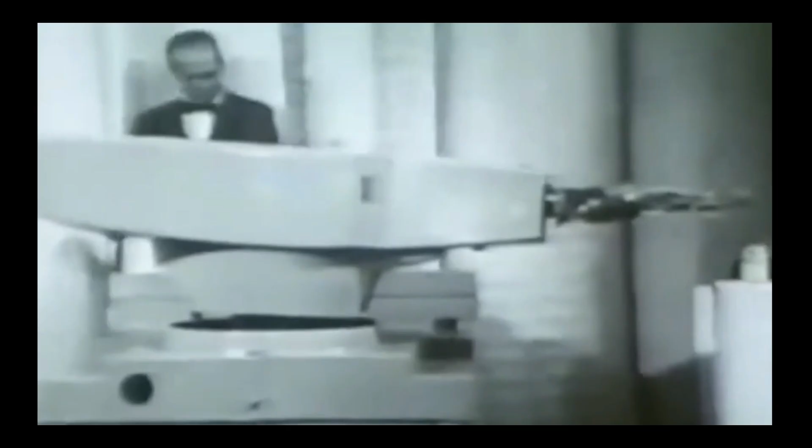Would you welcome Joe Engelberger? Joe? And ultimately, the show that was so important to us was the Johnny Carson show. That means it could play better golf than Carson could. Is that wild? You see, in case you get tired and can't make it to the show someday, we can program the machine to do a commercial. Now what he's doing is programming what he's going to have the machine do. He's putting this information into the machine. Take it on the downbeat.

So when I hear that people are worried that robots are going to take our jobs, as roboticists I point out that in 1966 we were already worried about robots taking the band director's job and the advertiser's job and all these crazy working smart things.

But the real message here is safety. In spite of the fact that you had an industrial robot, which was very dangerous, on stage next to Johnny Carson, it could have killed him. The industrial robots, there's no people involved.

So we're talking about humans in robotics. Just go back to the beginning and look at the last 60 years of history of robotics, most of it was robots behind safety cages, because safety is the number one issue about people and robots. And so when we didn't know how to solve it, we just said keep the robots and people separate.

Over the last 20 years that started to change. It started with little tiny robots that are sort of inherently not dangerous. And it started as early as 1979 with robots that just go really slowly and follow a track, and their whole thing is if anything gets in my way, just stop.

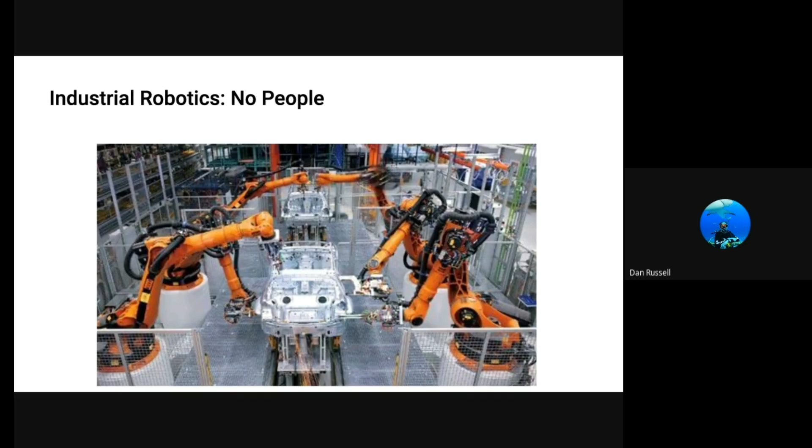I'll give you a little clip of that. Which gets to the second point: safety is one, and then the question is, why do you want robots around people at all? You want robots because you want efficiency. So here's your mailbot.

So if you want to see him go out, come back at 2:30. I don't know how, it goes a little way, but I don't know how long it'll go.

How do you and Igor get along? Fine, problems sometimes, but it works great. It's better than walking around delivering the stuff, saves a lot of time. Not much problems, it'll go offline and it's hard to start up again. There's little tracks right down there, and it's got to be on the tracks or it'll stop and it won't go. It doesn't take long if you know what to do. If you want to see the inside of it, I'll show you. This will control it if it's offline, and this little light will go on, and that'll show you that it's offline. And these will tell you how low it is, and you plug it up so it gets juice in it, so that's good. And then it's got the bumpers on it, it's a little broken, but like if... How do you feel about having a coworker who's a machine as opposed to a person? It don't really matter, it's less, you can't argue with it. It works the way you want it to. It does what it's supposed to do. It's better, it doesn't have to be paid either.

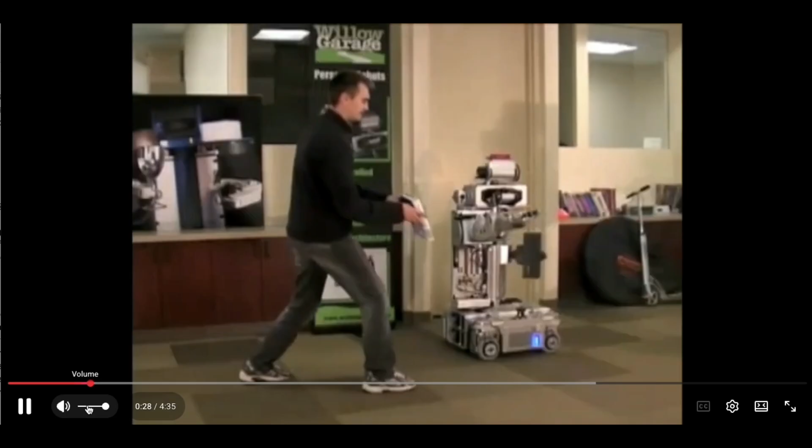Guinness, it would bring you that beer, but if you asked for a Bud Light, it would say, 'Are you sure you want a Bud Light?' This was playing pool, and delivering a beer and playing pool were both 1-week projects once you had the hardware and the core software. So that was the big thing about this.

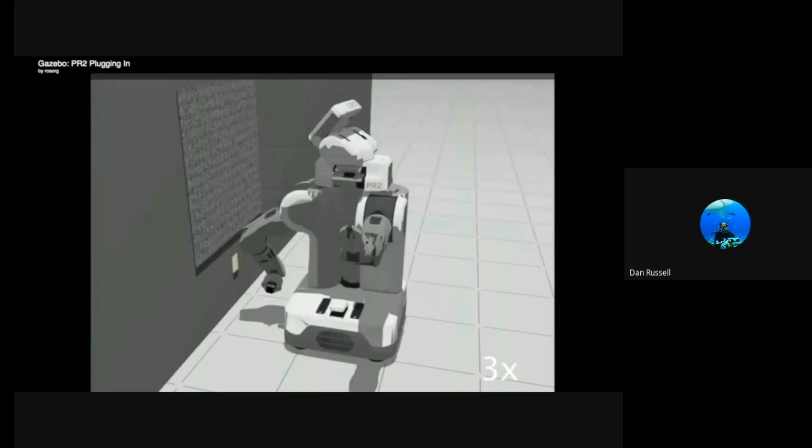And this was happening again around 2010, 2011, so just a little over 10 years ago, and that was state of the art. Some of the challenge problems, like can you push a cart with the robot? A lot of these things, people start to take it for granted now.

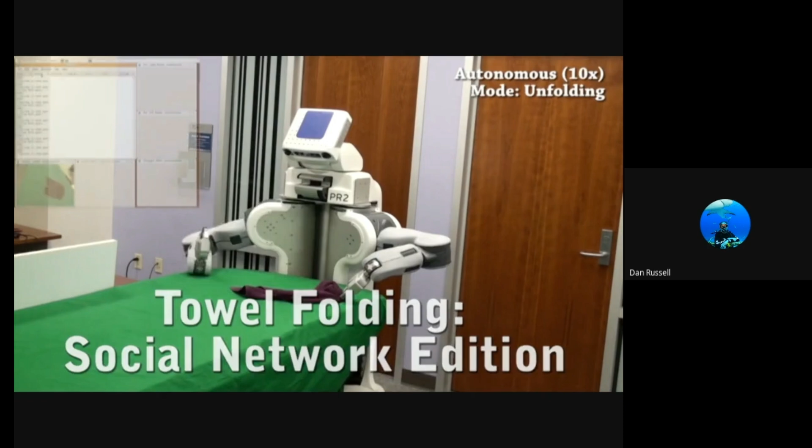The other thing we learned at Willow Garage is that in robotics, if you see a video, you usually don't want to trust it, right? We can try a demo 100 times, and when it works once, we got that one on video, and then it gets shared. That was kind of what was happening. The point of building 20 of these robots was people could repeat each other's experiments and prove that it wasn't just a one-off thing.

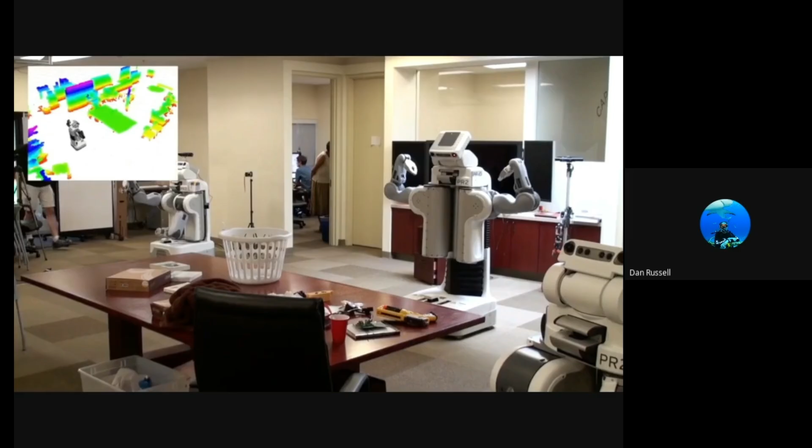So a lot of this was about creating software and hardware. This TurtleBot is a very popular platform now, and it's a lot cheaper. We built all these systems with the idea that let's let people work together, let's work on collaboration, and then let's look at home and human scale tasks.

One of the tasks, this was one of the workshops, lots of different videos of this robot. Interestingly today, I think maybe 1 or 2 of the 50 robots that we built like this are still in service. So after 10 years, the hardware goes bad.

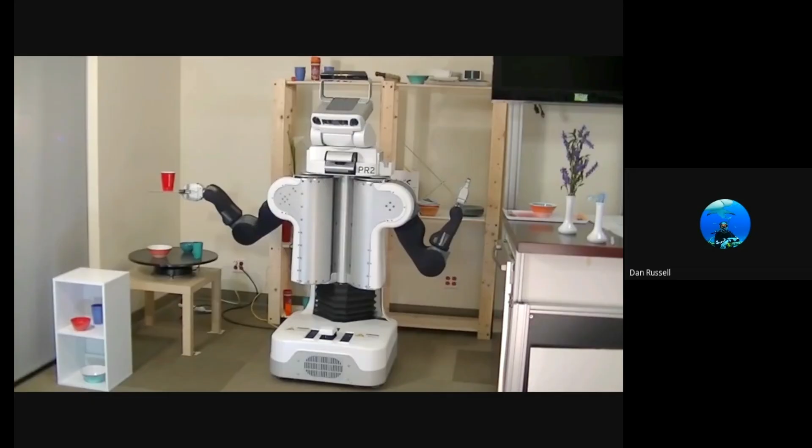The software has continued to evolve and continues to be supported, and is the standard. The robot operating system is called ROS, and it's the standard in robotics. So it's interesting to think that when you create something, we thought, oh, the hardware is so cool. I show this because we worked so hard on computer perception, and all that stuff was terrible because we were waiting for that breakthrough in foundation models that happened around 2012, when this system was ended.

This is pretty cool: using a cup full of water, you can move it without spilling it. So that's just a little overview of kind of where I came from, back in robotics. But a lot of the thoughts in those days were, how can we put robots around people? How can we make a difference for people?

One of the interesting things, we did a whole year-long study. First we asked the question, where should we focus? Should we focus on robots in the home, or should we focus on factories? Since factories have been well served by robotics for 50 years at that point, we said, let's look at the home. And we studied the home for a year. What do you think people want in home robots? What do you want your home robot to do?

Anybody? I wanted to cook my dinner. Cook? Yeah. Laundry, dishes. I wanted to clean. Clean, yeah, that's fine. Make my bed. What came up as the top 3 for us was laundry, dishes, and they wanted the robot to do our homework, which is not really a good use of robots. I mean, it might be from the kid's point of view, but from the parents' point of view, it's not a good use. And interestingly, with laundry and dishes, you already have 3 machines to do those 2 tasks in your home today, but it's not enough. Somehow we want more. We're very spoiled.

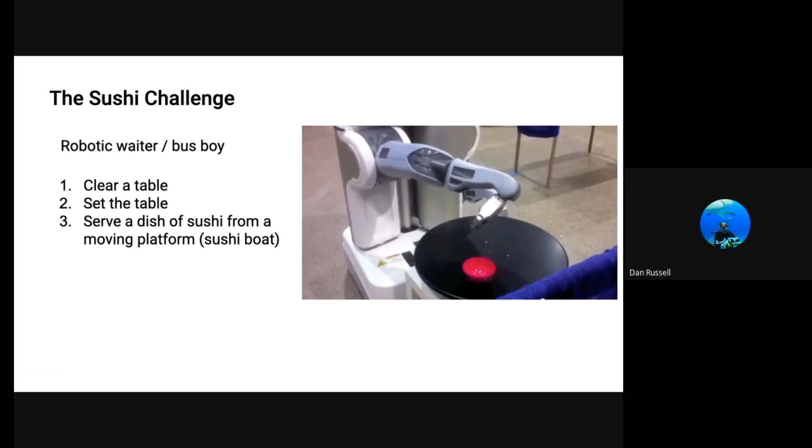So people were experimenting with different interface devices that allowed me to control and have the robot mirror what I'm doing, if I look through the robot's eyes.

Hello, I'm mute and quadriplegic. Can't talk, can't move his arms, can't move his legs. I'm mute and quadriplegic. I saw your robot on CNN, and I'd like to use that robot as my external body. Can I please try it?

And we're like, this is a weird request. But he lives in Palo Alto, so we invited him down to Menlo Park and got to know him a little bit. Turns out he can move his head. So he moves his head, and you put a dot on his glasses with a camera. The camera tracks the dot and maps it to mouse motion. So Henry's able to move a mouse on a screen, which means he can do an on-screen keyboard. An on-screen keyboard means he can send an email, and that's how he had communicated with me.

So that was interesting, we thought maybe Henry could use the robot. We all went our separate ways, went back to work, and then 2 months later Henry sends me another email with an attachment. He says, I designed a user interface for me to use with your robot, I really want to do it, would you please implement this interface and have me back? This is a really strange request, but Willow Garage was a strange place, we were a think tank. So we had Henry back a couple months later after we had a student implement the interface.

Imagine there's a table here, and Henry's sitting here with this computer in his wheelchair, and here to the left is the PR2 robot. We had a bunch of things on the table for the robot in the midway, and we're thinking Henry's going to reach the arm forward and pick something up. The interface was kind of simple. He doesn't do any of that.

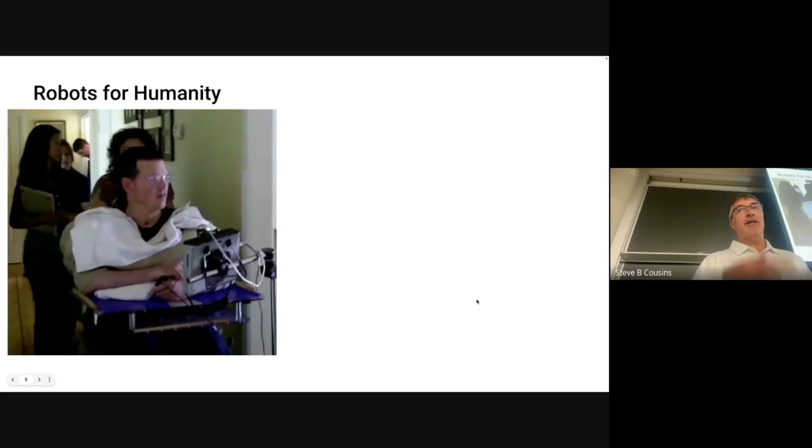30 to 40 times a day he gets an itch, so much so that he has a gesture with his head that he does for his wife that means 'scratch my itch.' They communicate with really cool stuff. Actually, I'll show you.

Hello, my name is Henry Evans, and until August 29th, 2002, I was living my version of the American dream. I grew up in a typical American town near St. Louis. My dad was a lawyer, my mom was a homemaker. My 6 siblings and I were good kids, but caused our fair share of trouble. After high school, I left home to study and learn more about the world. I went to Notre Dame University and graduated with degrees in accounting and German, including spending a year of study in Austria. Later on, I earned an MBA at Stanford.

I married my high school sweetheart, Jane. I am lucky to have her. Together, we raised 4 wonderful children. I worked and studied hard to move up the career ladder, eventually becoming a chief financial officer in Silicon Valley, a job I really enjoyed. My family and I bought our first and only home on December 13th, 2001, a fixer-upper in a beautiful spot of Los Altos Hills, California, from where I am speaking to you now. We were looking forward to rebuilding it. But 8 months after we moved in, I suffered a stroke-like attack caused by a birth defect.

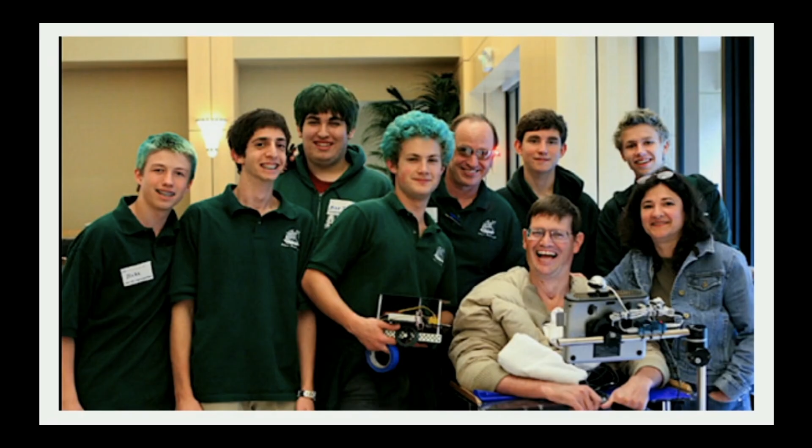Overnight, I became a mute quadriplegic at the ripe old age of 40. It took me several years, but with the help of an incredibly supportive family, I finally decided life was still worth living. I became fascinated with using technology to help the severely disabled. Head tracking devices, sold commercially by the company Madentec, convert my tiny head movements into cursor movements, and enable my use of a regular computer.

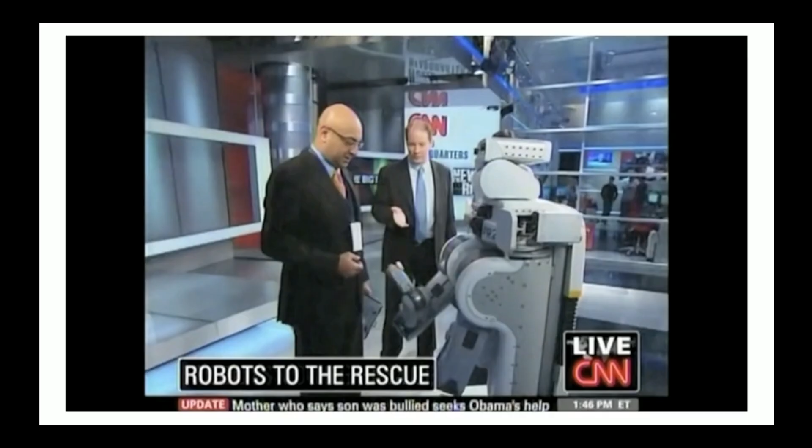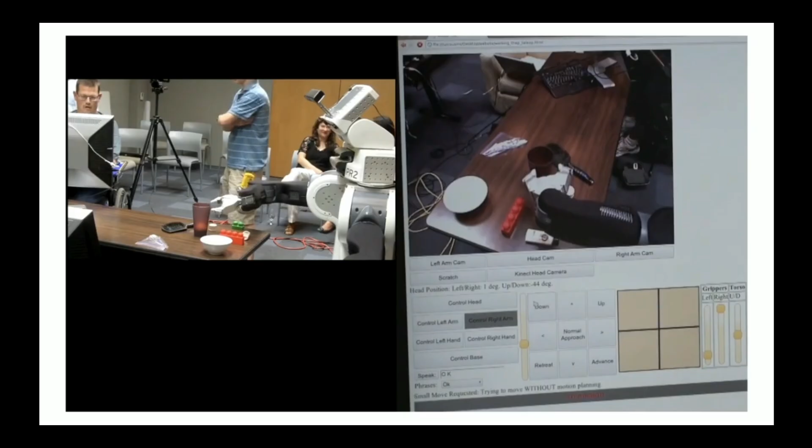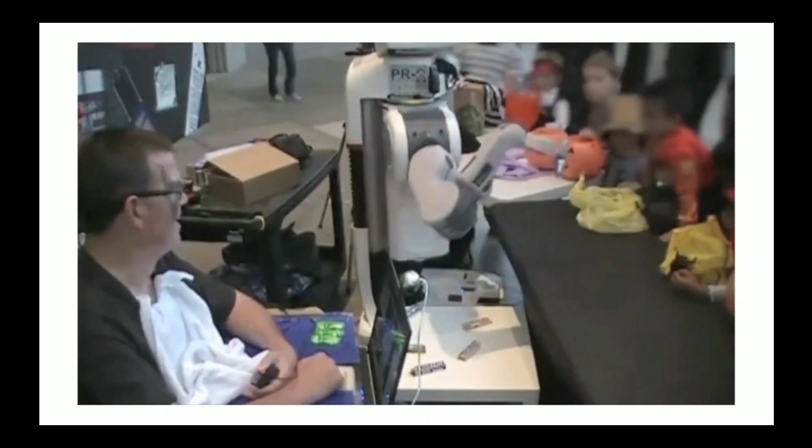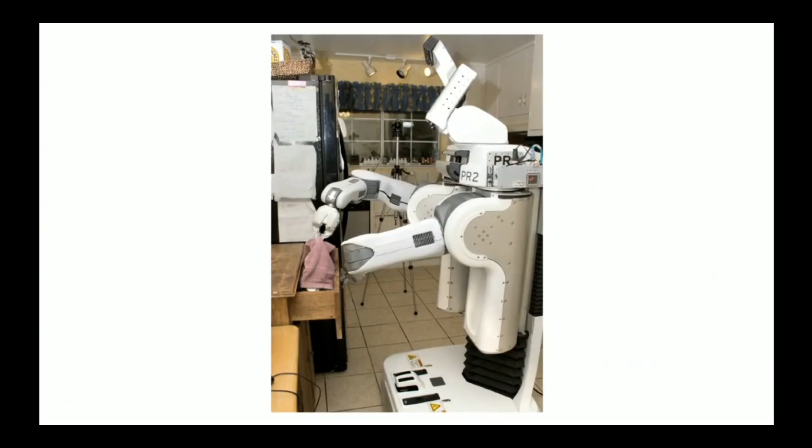I can surf the web, exchange email with people, and routinely destroy my friend Steve Cousins in online word games. This technology allows me to remain engaged, mentally active, and feel like I am a part of the world. One day, I was lying in bed watching CNN when I was amazed by Professor Charlie Kemp of the Healthcare Robotics Lab at Georgia Tech demonstrating a PR2 robot. I emailed Charlie and Steve Cousins of Willow Garage, and we formed the Robots for Humanity project. For about 2 years, Robots for Humanity developed ways for me to use the PR2 as my body surrogate. I shaved myself for the first time in 10 years. From my home in California, I shaved Charlie in Atlanta. I handed out Halloween candy. I opened my refrigerator on my own. I began doing tasks around the house. I saw new and previously unthinkable possibilities to live and contribute, both for myself and others in my circumstance.

So you get the idea, it's pretty amazing. And over 10 years, actually 12 years now, since 2013 when he gave that TED Talk, he's managed to survive, which is an amazing thing. If you're a mute quadriplegic, to be 20 plus years out from the event that caused it is pretty amazing.

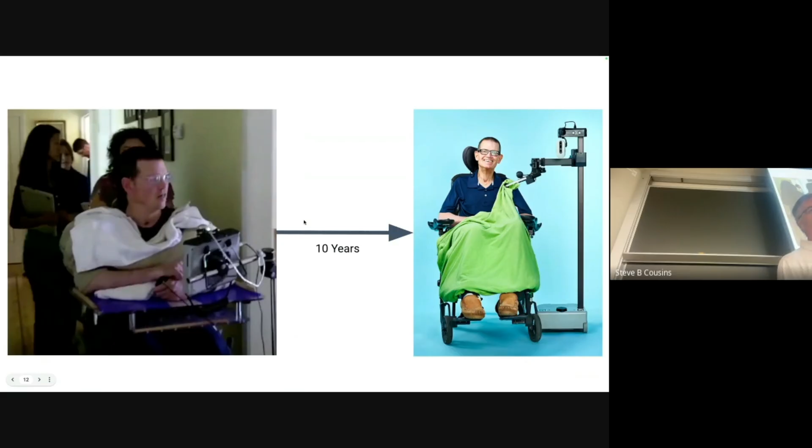The coda to the story is Henry recently had his granddaughter over to his house, and his granddaughter typically would ignore him because she viewed him like a piece of furniture. He's just sitting in the chair, he's not moving. But he started using this robot to play with her. And when she went home after that, before she left, she gave him a hug. So that's kind of the coda to the story.

The other interesting thing that came out of Willow Garage was this telepresence, and it seemed like a great idea, right? Henry used a robot like this for his talk. This is the original version that was built by a guy who lived in Indiana, but he wanted to work in California, and he wanted to be part of the group. Before he built this robot, I knew that we had a person in Indiana, but I had no idea what he looked like or anything about him. After we had the robot, he's wandering down the hall, and you'd pass him and go, 'Hey, Dallas,' and he'd say, 'Hey, Steve.'

And so it's just normal hallway interactions, which is amazing in terms of making you feel like you know somebody. This robot also turned out to be the same robot we leased to the studio that did the Big Bang Theory. So this was the Sheldon bot, if you ever see that episode. But it wasn't successful, right?

Scott Hassan, who's got a lot of money and had funded Willow Garage himself completely, went off and funded this company called Suitable Technologies to build this beam. They called it the beam, this telepresence robot. And in the end, it was not successful, right?

And why? It's timing, right? He started it around 2013, 2012, and by 2019 they shut it down because in that same time period, smartphones appeared, right? You don't realize history is changing, and there was no Uber 15 years ago. It's amazing how fast things are changing. Now we're like, well, Uber's old school.

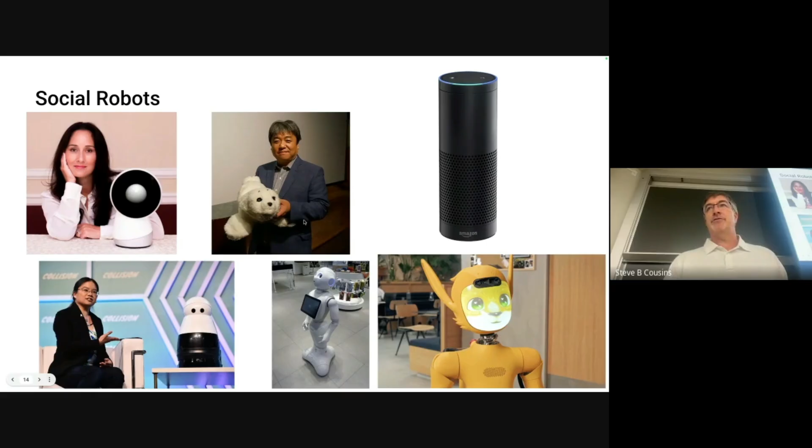But the alternatives is always the interesting question.

You can see we were trying to literally design delight. And this is the biggest problem with putting robots in hotels - it turned out to be elevators, of all things. This was our attempt to solve that problem, which is another interesting human-robot interaction thing.

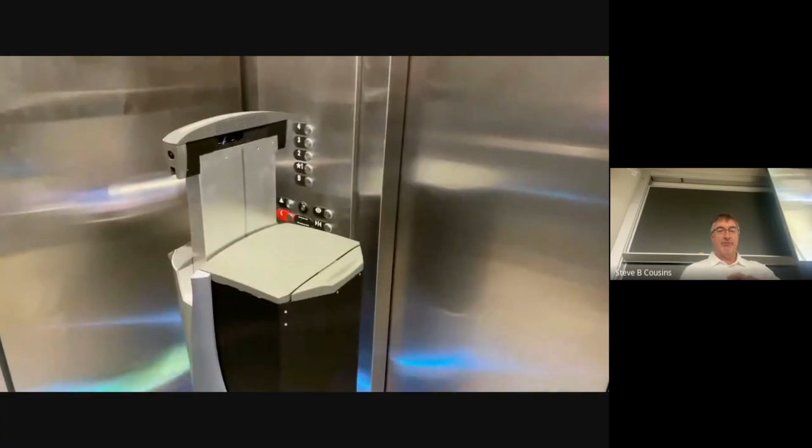So we built this little delivery robot called Relay, and the idea was it can deliver to your hotel room, you can bring stuff. And the first question was, okay, in order to get to your hotel room, you have to ride the elevator. Are people going to be okay with that? So where do you stand to wait for the elevator? When you get in the elevator, where do you stand?

So we designed this whole system where the robot would stand off to the side because you got a lot of people exiting, delay a little bit, door opens, and the robot's in control of the elevator. So we had to do a wireless interface to the elevator, so we could tell it, come to the first floor, and when the door opened we would say hold the door. Now we have plenty of time to make sure everybody's out, and we would get in, and then we would turn to face the door. Doors would close, and we would stand there very quietly until it got to our floor, and then when the doors opened, we would say hold the door, and we would get out. Everybody was okay with that - it wasn't a big problem.

But it turned out to be a big problem to get integration with the elevator, for a bunch of reasons - you can imagine what happens when you lose connection with the elevator while you're riding it. So I don't have connection to the elevator, the door's open, should I get off or not? I don't know what floor I'm on. So we had to do all kinds of cool engineering hacks, and we got it to work. But eventually we decided it takes too long and too much money to integrate with the elevator wirelessly, because you have to go through the elevator company, they have to do the work.

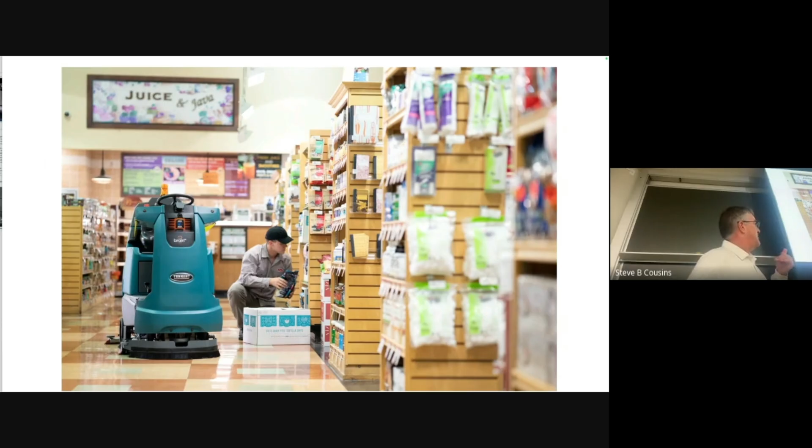And this one actually is fairly successful. Walmart's got a bunch of these. They're in grocery stores and things. So just another example of robots you may see in your life that you don't realize are there.

This is a very subtle one. This is a woman from Japan who works for IBM Research, and she's blind, and she designed a robot in a suitcase form factor. Basically, it's got all the sensors of a robot. It's got a little bit of motors so it can move itself, and it's got haptics in the handle so she can feel obstacles and things. And then she just walks with her thing, and it looks more subtle.

Now, interesting thing—there's a student here, an undergrad, we've been walking. What's the project called? BIM. There's a project called BIM. And what they did is they gave you a handheld, a replacement for the white cane, right? And they found something very interesting.

The handheld device will give you, like, you can simulate all the haptics of taps pretty well, and give the sight-impaired user the ability to navigate through the world nicely with this thing. But there's no white cane anymore. So the people around don't realize that this person is sight impaired, and they might run into you.

If you see somebody with a white cane, you're going to give them a little bit of a wide berth. That's a signal. The white cane is a signal to the rest of the people. We've taken away that signal. So this is, again, to Dan's point about, when you put technology in, you've got to think about the alternatives.

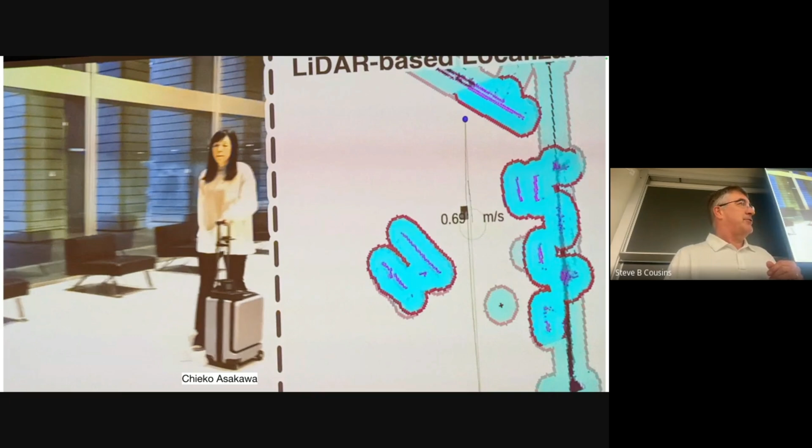All right, I think at this point, I'm going to turn it over to Michelle and talk about the future of senior living.

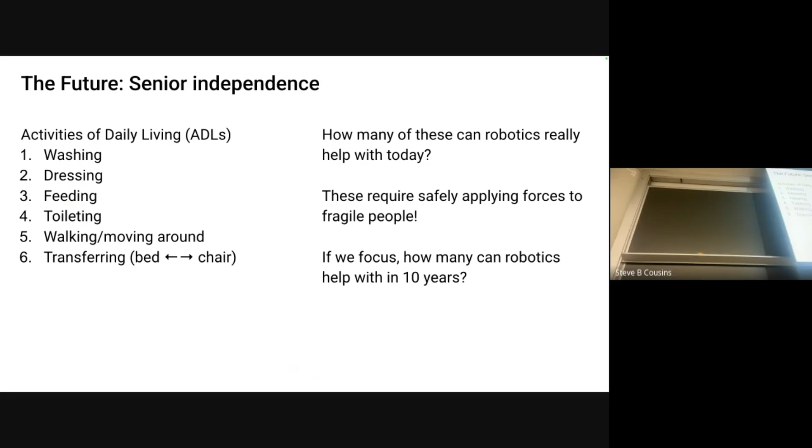I do questions at the end, I guess. How much time? I don't know how much time. We have whatever this says. 31 minutes and 42 seconds.

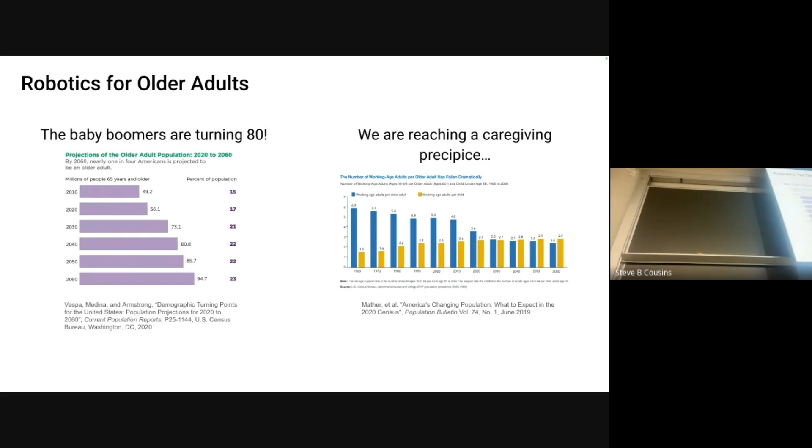So we have a project now at the Stanford Robotics Center that we're calling SOAR, Stanford Older Adult Robotics. The way we're actually approaching this problem is to not just start out and say we are sure we're going to help you with activities of daily living, but let's take a really close look at what the needs are that our older adults have. And it's not just the older adults by themselves, because older adults do not live just by themselves. They are part of a constellation of a family that includes your caregivers, includes your medical team. So you really need to think, when you're designing systems that would work for people, how it works for the whole entourage, the whole group together.

So we've been doing a survey as to what the current enabling technologies are that are in use by older adults. Those can range from anything from your walker to something like Alexa, to possibly glasses, hearing aids. Those are all problems that we face as we get older. We're surveying what the current robotic capabilities are, and then we're looking at where in that intersection we might be able to make a difference.

I like to think here—this is a bit what Steve was getting at when he talked about the original focus for the project and where we've moved to. You can think about how we help older adults with their needs in terms of assisting with the limitations they have. A really good example would be the walker or the wheelchair: I have a problem with my mobility, is there a device I can use so I can get around?

We also think about this through the Stanford Center on Longevity, where we have a collaboration and a postdoc who just joined us. One of the things they think about is how we can have scaffolding for healthy aging, since we're all living longer lives. Across a lifespan, you can think about the implications even starting from a young age—how do we plan for these longer lifespans? So we can think about systems that are more proactive rather than just reactive.

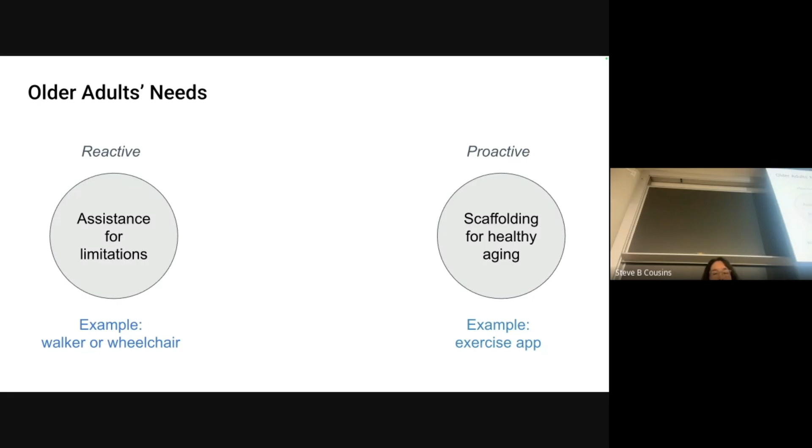An example in this mobility space might be an exercise app—something that encourages me in my walking.

We have questions of physical health and mobility. Social, cognitive, and mental health is such an important area of concern for older adults—you start losing the people you've been close to, your world gets a little smaller. How do you stay engaged?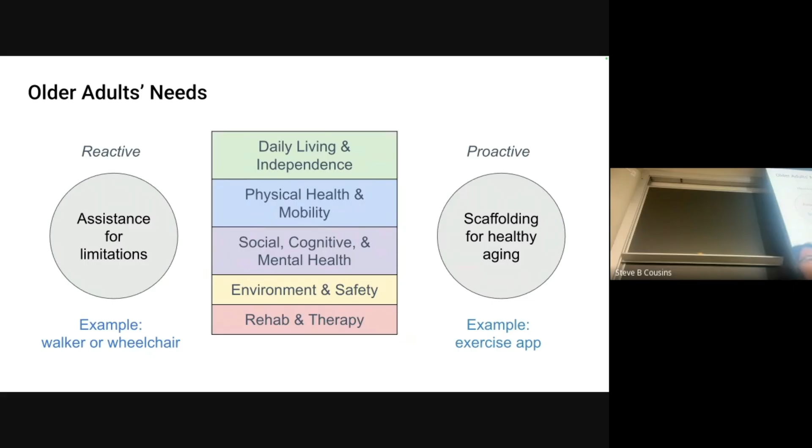We can think about environment and safety. Very often, one of the first things that happens when you start having physical challenges is you need a grab bar in your bathroom. There are a whole bunch of ways we can make our environments safer. And all of us at some point in our lives probably may need some rehab or therapy, and that becomes more of an issue as we age.

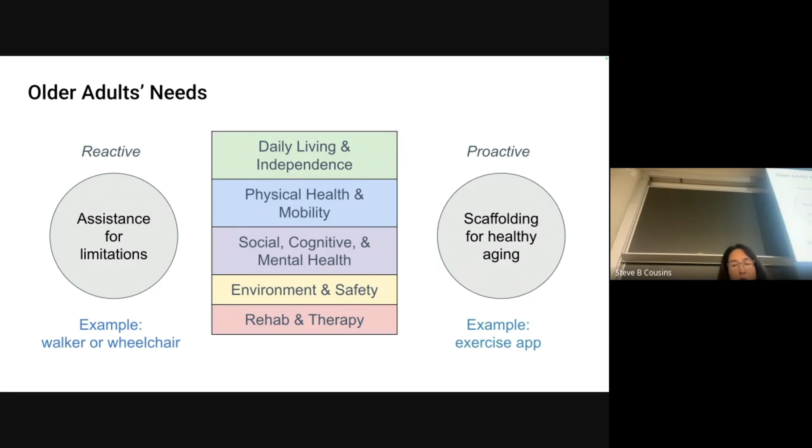At the robotics center we're looking at these different categories, thinking not only about assistive robotics but what you could call wellness robotics. I'm going to take a deep dive, since we can't cover everything as we're at the initial stages of this project, so we decided to look more at this area of wellness robotics.

We've been really struck in the literature by a couple of facts. If you look at older adults and exercise, studies show consistent physical activity in adulthood is linked to better health—in fact, to a 30 to 40% lower mortality risk.

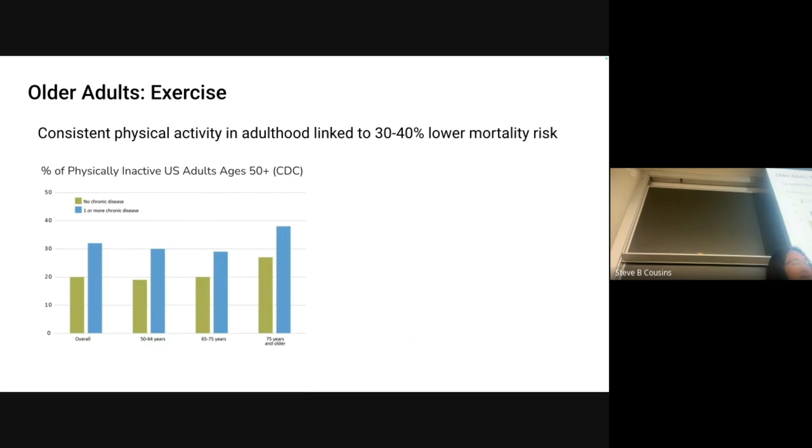That's great, we all know we should exercise, but who really does? Here in the Bay Area we have such an exercise culture that we don't always realize there are a lot of physically inactive adults. The CDC has done a study: the percentage of physically inactive adults in the US ages 50 and up is somewhere in the range of 20 to almost 40%, and that number is really affected by whether or not you have one or more chronic diseases.

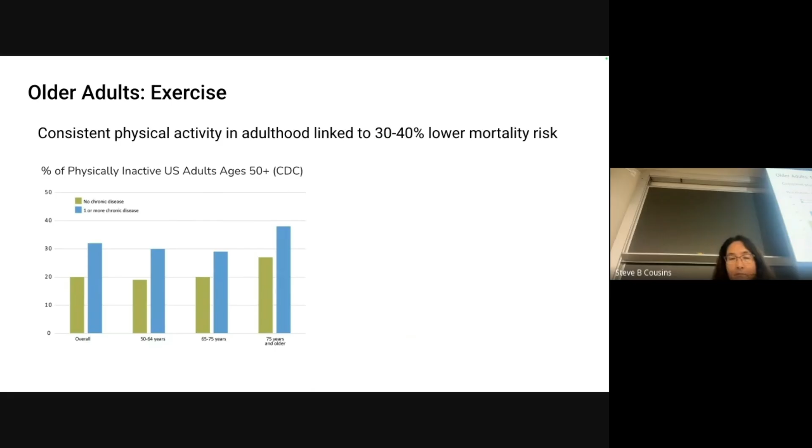Another thing to think about is older adults and loneliness. Loneliness is not good for our health—it increases the risk of dementia by 31%, and there's a statistic associating it with 100 deaths an hour.

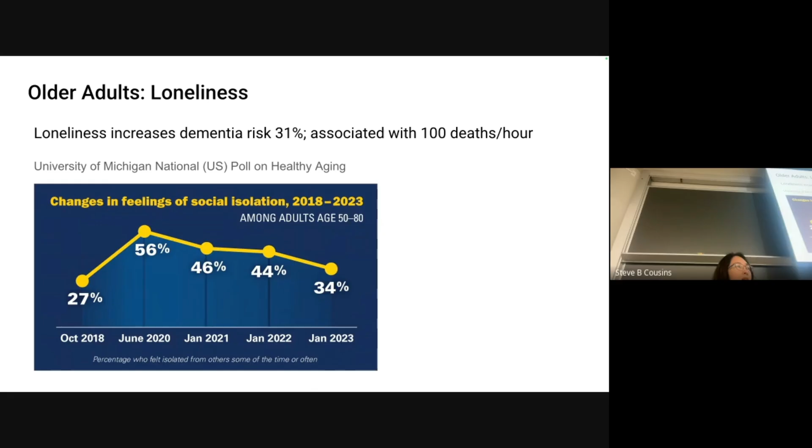But how are we doing? This isn't just about older adults—it's sadly a widespread phenomenon hitting people of all ages, and COVID was not at all helpful for this. This graphic shows changes in feelings of social isolation among adults ages 50 to 80, but we're also seeing this in young adults, teens, and tweens. Wouldn't it be wonderful if we, as a society, could find a way to help with that? So that's our question: is there a way robotics can help older adults in this space?

So if we look at the merits and the need for exercise, the need for social connection, our question is, what if we had a walking companion robot? How could we design such a thing? So for starters, we want to talk to seniors, to caregivers, to senior living staff, so we can understand what are their pain points, what stops people from getting out and walking more often.

We want to see what's out there. This is something that's out there with a little bit of addition by us. Let's take what's out there, let's see how we can improve it, let's try some new things. And as we try these new things and see what's out there and ready to use, let's go out to our older adults, find out how they would respond, see what works for them, and then let's iterate. So we're at the beginning of this project right now.

We have a couple of master's students who are going to be working with us on some new hardware designs. We have a postdoc who's going to work on some robotic smarts like navigation. And we have some robot toys that I'm going to show one of them to you. Let me see what's on this.

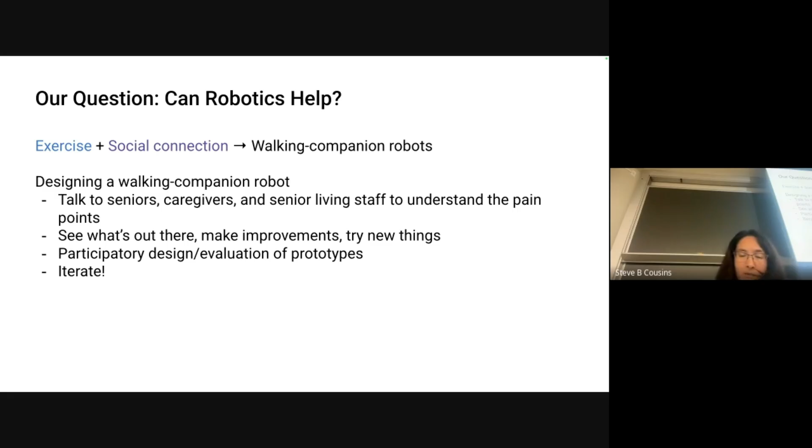Let me just say a little bit about who our local senior communities are, and then I'm going to talk about this guy. So it turns out there are a lot of different kinds of settings in which seniors either go for socialization, or actually live at, or go to spend time to give their caregivers a break. There are also seniors who are living independently. At the Stanford Robotics Center, we think it's really important to make connections to all these different types of communities. So I just have a short list here - there are many more. I'm actually amazed at how many different senior living configurations and settings we have just within a few miles radius of where we are.

In fact, next week we're actually going to have some folks from the Channing House, which is here in Palo Alto, come to give us what we're calling a mobility device clinic. So there are walkers, there are canes, there are some people who use trekking poles. How do people make decisions on what to use and when?

I'm going to come back to this, but let me just show you what this is. This yellow face, to which we've added a rig, comes to us from a company called Piaggio Fast Forward. It's a pretty simple robot, it's sold, you can buy it. It's relatively inexpensive. It's a cargo carrying robot, kind of like these lunch delivery robots you might see roaming around on sidewalks and places. And it knows how to follow you.

So I'm going to just quickly demo that part of it. I'm going to come - it's got cameras, it doesn't know me, anybody can come up and do it. I'm going to hit the top, and now we have a self-balancing robot. It'll follow me around. When I walk around campus, I also find I get a lot of attention when I do this. So there's one way of making social connection. And I'm going to talk about what's on the rig in a little bit - I just wanted to give you that as a starting point.

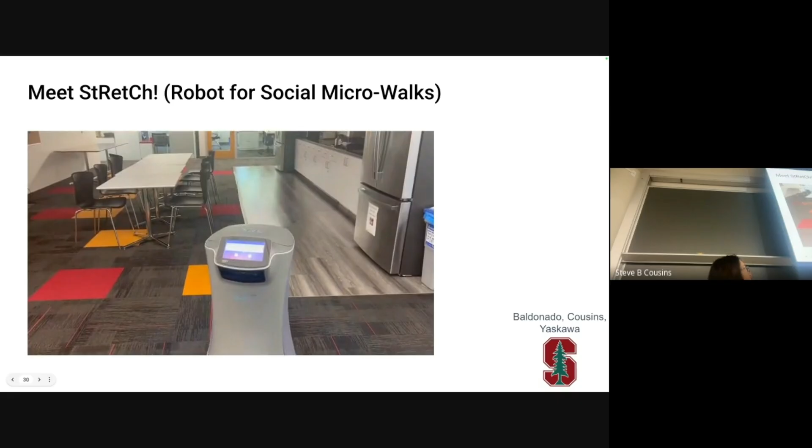Let me just play the video. So this is over in Gates. The robot is coming over to Steve's and my office. When it gets close, it's not actually going to give us a delivery right now. Instead, it's going to remind us about how important it is to walk. It's making these cute little sounds.

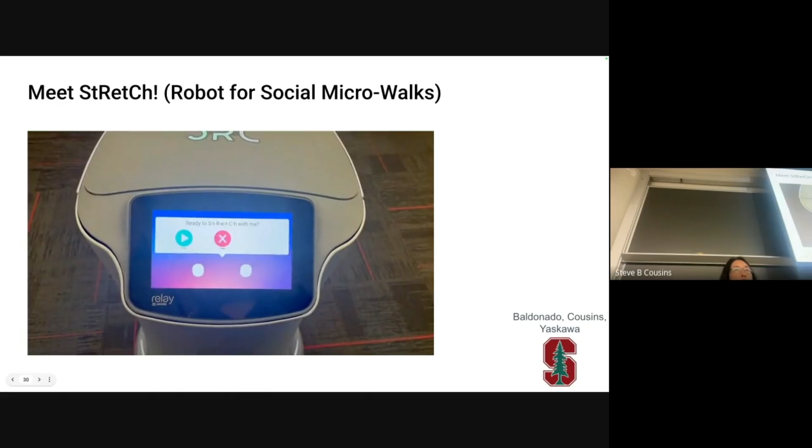It turns out there's a whole phenomenon that's been studied about micro exercise. All of you who've just been sitting here, I'm glad that you're going to get up and walk to your next class after this. Turns out even little snatches of movement are very beneficial for your health.

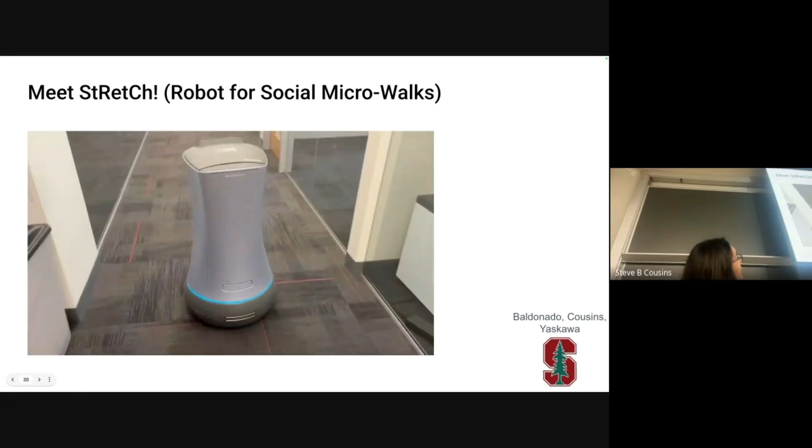So this robot has just asked if we want to go for a walk. The idea is that this would be somewhat social. Back in, I don't know, maybe Xerox PARC days, you could go to the water cooler and have a conversation. That doesn't happen so much anymore.

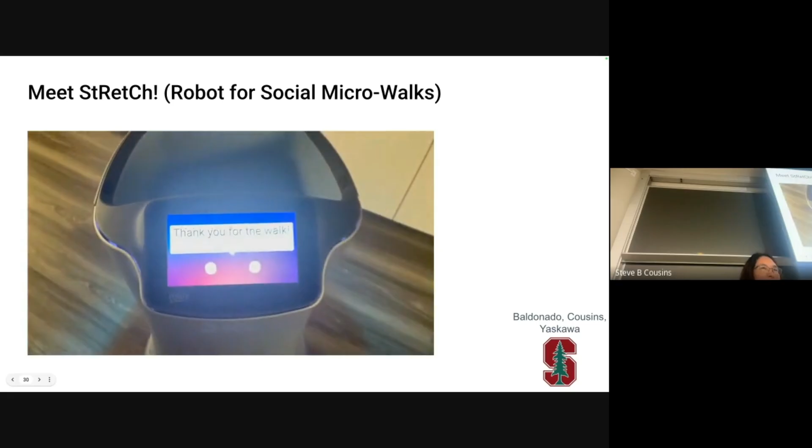So this robot actually has gone and made a circuit in hopes of rallying other people to come on the walk with us. And when we get back, we do get presented with some water, although we have an old version of the robot where the cargo heats up, so the water's not quite so refreshing, but you get the idea.

It also turns out that because of remote work, we don't have that many people on our hallway right now, so we don't tend to get other people coming around. But we talked about this with the CEO of Channing House, who said that there is a group of people at Channing House that likes to take walks together.

And it turns out at Channing House, they have like a rooftop, which is quite extensive. And people who don't feel comfortable going because of maybe the terrain or the fear of falling, they walk together on the rooftop. And the question is, how do you actually get a walk started?

I could have a reminder to go for a walk that comes on my watch, that comes on my phone. It's really hard to ignore the elephant in the room when the robot comes by and says it's time for a walk. So the question is, when does it matter if you're embodied in a congregate setting, like a retirement community where people are living?

Sometimes you need someone to make the first move. That can be a hard thing if you think about social norms. So maybe this is a way a robot could be a little bit disruptive. And Rhonda at Channing House is game for us to bring the relay robot and try that.

Okay, so I showed you already a little bit about how Rosie works. I don't know if I mentioned we named this one Rosie. Some of you might know the Jetsons, although it's from a long time ago. It's before my time, so I wasn't thinking about Rosie when I named it, and then somebody had to tell me about it. Rosie is the robot for outdoor socially interactive exercise.

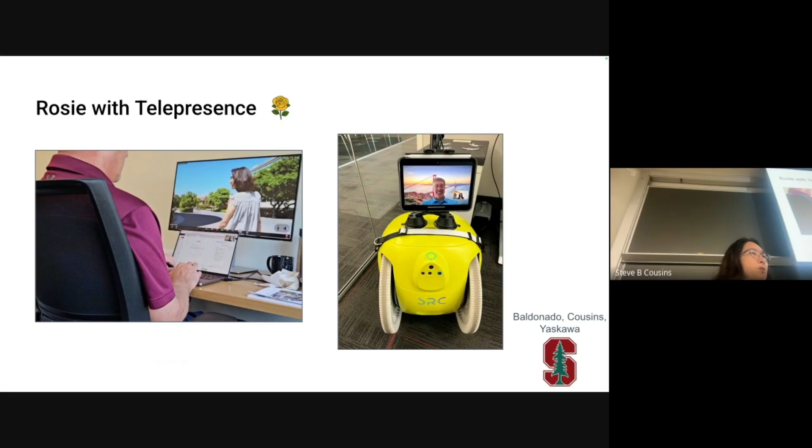So we've used Rosie again with telepresence. You could basically do Zoom on your screen, and now you're out taking a walk. Steve and I did this soon after we got the robot. It was pretty cool. He came with me to the Rodin Sculpture Garden. We still kind of remember like we did that walk together.

Except that I wasn't there. Except you weren't there. Yep, he was. Well, he was there. He was there on the screen. So it starts to conflate your notions of what it means to do something together.

Again, we're talking about having a location-aware conversational chatbot on there right now, but what are we going to do next? We're at really the starting points. We're doing these initial experiments to see what range of experiences we might be able to provide, while simultaneously having these conversations with people in senior communities about what they would find useful, and what it would take to get them out and moving, because we know it's really good for you.

So we keep hearing about falls. Every place we go, people are telling us about their falls. This is especially apparent if you go to one of the centers where we have adults with cognitive limitations. Steve and I visited one, and it was really quite striking that at this particular place, everyone sat around a table. This is an adult day center where people just go for the day to give their caregiver a break. Because of their staff ratio, they just find it easier for everybody to sit in place rather than having people moving, because then you have to worry about how people are going to get around, and if someone's going to fall, that takes staff attention away from the rest of the group.

So it seems clear that the next generation of this robot, we would like to be able to have it lend some degree of mobility or balance support. We'd also really like for it to be able to handle urban terrain. Again, it would be great if it could at least get over a curb.

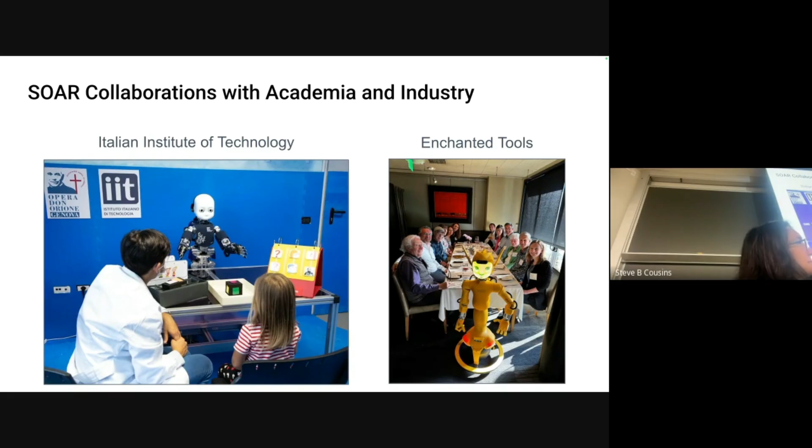I think Michelle hit a little on it - when you embody something and it comes into your space, it's harder to ignore. So there's something nice, something consistent about that. But it is the case, as I was kind of saying, you don't necessarily need the screen, you don't need all these motors to have something moving around. If all it's doing is talking to you, you have to somehow overcome the cost of those extra degrees of freedom, those extra motors, the extra complexity of the system. You have to provide value that's commensurate with the cost. And that's really not trivial, to think about what you can do.